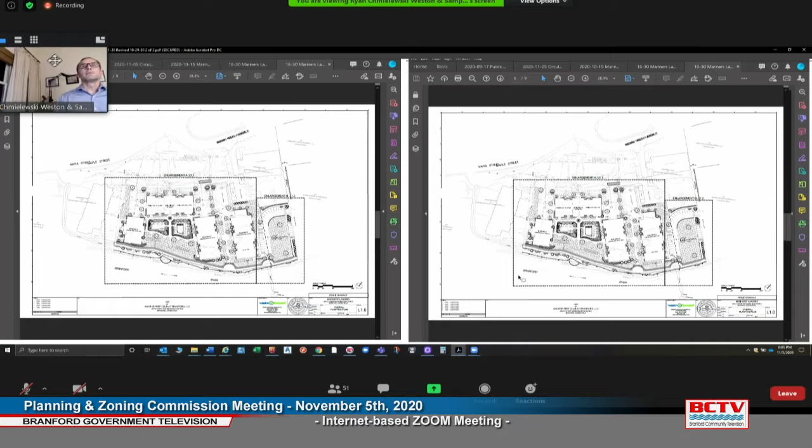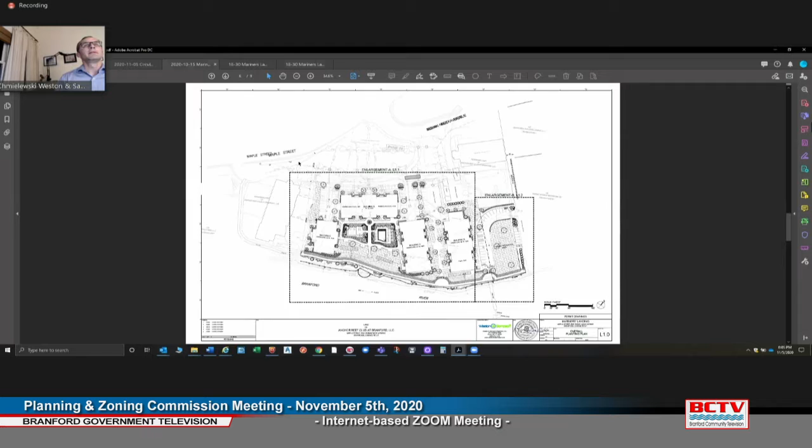As an overview of the project, along the shoreline you have the 8 foot concrete sidewalk and the 7 foot of stone on the uphill side. I have an enlargement detail of these that we used to discuss with Mr. Goucher, showing it closer at 20 scale, where we're almost 12 feet away from the building now. We've put a screening of northern bayberries to provide more height and a vegetative buffer between the two, rather than just a vegetative seed mix.

And then on building C we've done the same thing. The walkway is now between 14 and 15 feet away from the corner of building C, and we've also increased and added a vegetative buffer on this edge as well, rolling it back up into the hillside.

In terms of, while I have the PDF up here... Can I ask a question about the last one? Sure. What's going on the slope with that hatch mark area? That is a native seed mix, slope stabilization mix by New England Wetland Plants, which will also provide wildlife habitat.

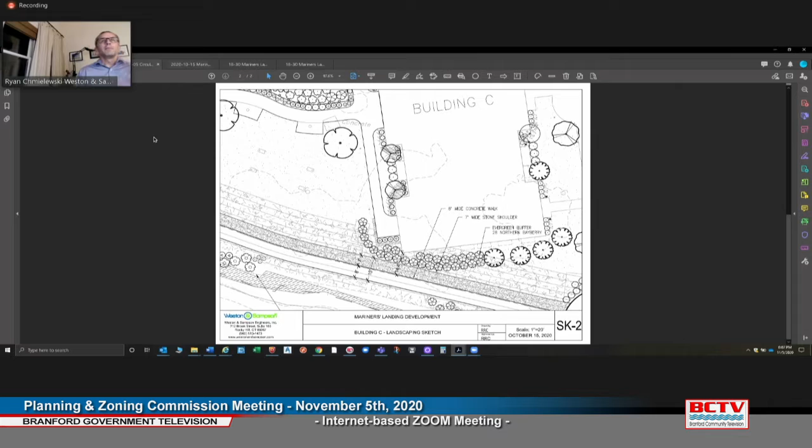So I'll move on to the pedestrian access plan. There are some minor tweaks that were requested for this plan, I'll highlight those quickly. We've added 2 signs just stating public access, intended to be placed down to the dock to let people know the dock is public access. Even though the brown kayaking and hand boat launch signs indicate that, this just reinforces it with language. We've added the second public recreation space signs in 4 locations along the perimeter of that public recreation space that's part of the plan. We've also added the vehicular circulation coming in and out to the public parking.

And we've made the connection showing the public access coming in and out of the cafe from this lower walkway. Prior to that we omitted that pedestrian access point. Ryan, Harry Smith, Town Planner - is this the plan you sent at 7 o'clock tonight to me? Yeah. Okay, thank you. Are there any questions about this?

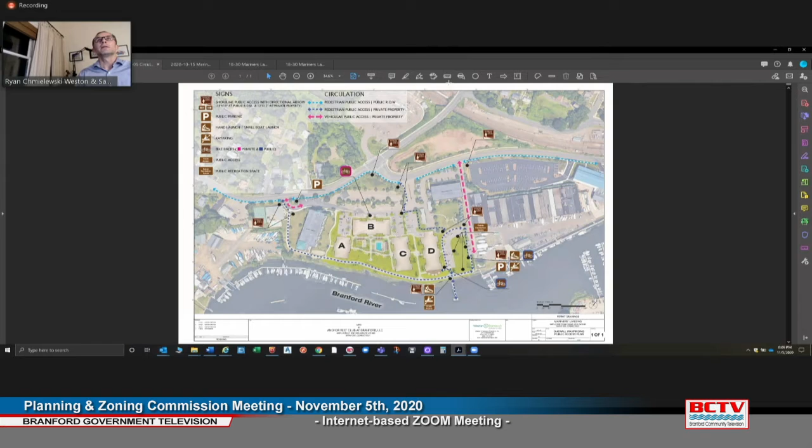I'm going to stop sharing, and then go to a description on page 10 of comments received from Harry Smith. He was asking to provide a description of how we tied the more robust planting provided in the revised drawings last time into the existing planting scheme and tied it in with the existing development.

Part of the changes: we covered the entire building perimeter where feasible with foundation plantings, just like the original building has been planted. We've added small flowering trees to the foundation plantings to be in harmony with the proposed architecture, provide more variation in planting height along the foundation to bring the buildings down to human scale, and provide more seasonal interest. We've also added additional trees along the public access walkway to the north of Building D.

This was stated in the previous public hearing, but I've now provided written comment: we've matched 2 tree species, 5 shrub species, and 1 ground cover. We changed the palette a little to be more in sync with the town's modern requirements for native species, to promote wildlife habitat and more resilient planting, and we've also made specific selections respecting outward views towards the water.

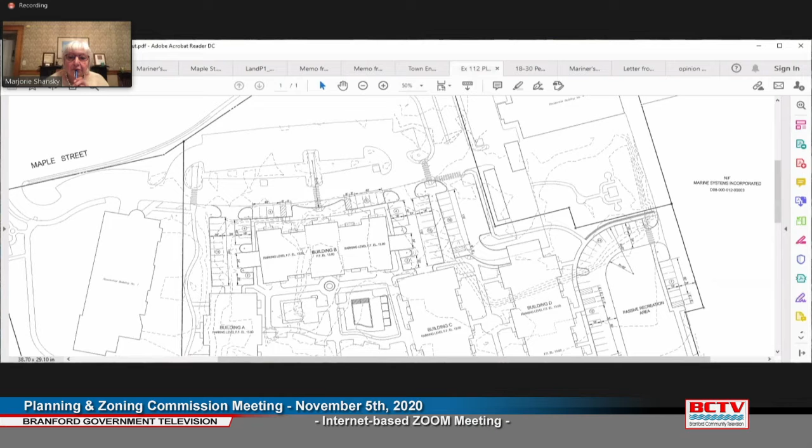You should be able to see the plan sheet from the revised plans submitted on Monday the 2nd. This sidewalk was missing and has now been added to the plan. I think that's an important connection, parking here, you can walk down to the public access. It sort of rounds out the whole thing, so that's been addressed.

Shoreline public access plan, I appreciate it. Looks like it addressed what I had requested. Going back to the comment down here, I just wanted to make sure all the features that are open to the public are on there and appropriately marked. I'd have to review that since we just got it at 7 o'clock, to make sure that's all set.

So down here, I think Attorney Shansky discussed this comment I made about having the new residents and tenants of the development be informed about the public access. I think that is very helpful. Possibly having each one sign off would be one more step I could think would be additionally helpful, but I think that addresses the comment.

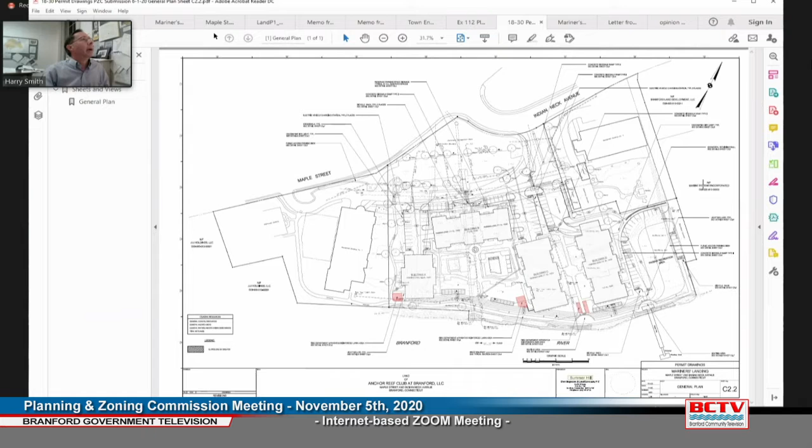Going back - I think the landscaping plans have come a long way and address all the comments. However, I'd like to take a look at them since they just came in this past Monday, to make sure all the details have been addressed. It seems like it's in good shape and has addressed all the comments. This was discussed tonight - how the revised landscaping corresponds and is keeping with the prior landscaping installed and on the plans.

I've got a separate memo on lighting I'm going to pull up quickly. I did do a detailed review of the proposed lighting plans. Generally, the pole-mounted fixtures are dark sky compliant, lighting levels are not excessive, and they're in good shape - they don't generate an excessive amount of light on the ground.

I did have a concern with the pole-mounted lights along the pathway, the Riverwalk. The detail shows these poles as being 12 feet, but the photometric plan shows them being 14 feet. It seems like the photometric plan's analysis of the foot-candles generated on the ground is based on the 14-foot height, but 12 feet is what was approved 15-20 years ago. It seems like 12 feet is what's proposed, but it's not clear since aspects of the plans don't agree with each other. I think it's important that it's the 12-foot height - it's a much more pedestrian scale. We might need to adjust the fixture somewhat to make sure it doesn't generate excessive light on the ground.

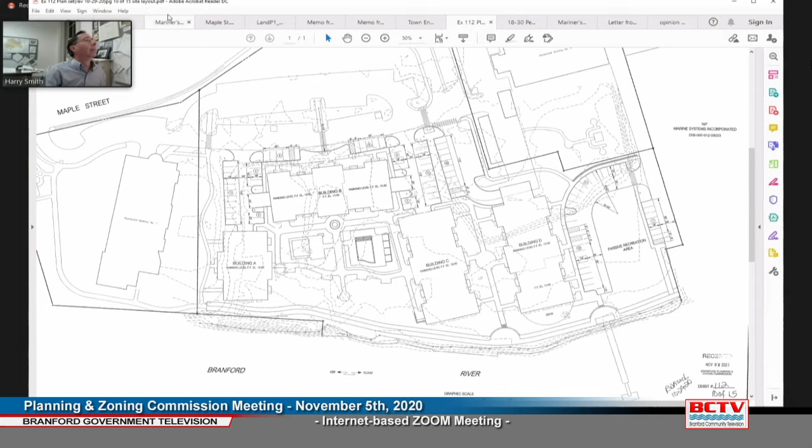So coming down to drainage, I think I've covered all that. Mentioned by Attorney Shansky, been reviewed by Town Center Village District. I think all of these are addressed.

I believe the tulip trees were replaced with an alternative. Frankly, I haven't looked at the last landscape plan, so I just sort of need to double check all of it.

We have comments from John Goucher. At this point, we really don't have confirmation that John Goucher agrees with the comments just received today from Mike Ott. I did forward those to John Goucher after the close of business, after 5 o'clock today, and I didn't get a response from him. I think I'd left for the day somewhat after 5. He did send something to me, but by the time I sent the other ones to him, I did not get a response back.

I did get the letter from Mr. Muniz, which was mentioned by Attorney Shansky. I understand this is within the purview of the DEP in terms of reviewing the work that's underway and approving the closeout of the remedial action. So that could be addressed in a condition on any potential approval, or buttoned down at some point, either for construction on the buildings or before occupancy.

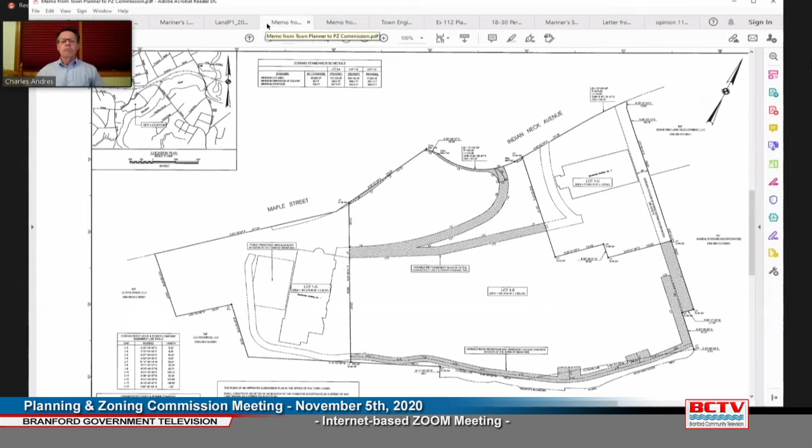Looking for my memo here. Here we go.

There's a methodology and several options to looking at the potential costs of town services. And this isn't, I don't think, a regulatory thing.

I just want to note for the record that I did submit a paper here that was presented by Dr. Mullen, an alum of my planning school. This is available at the Lincoln Land Institute. They request that there be no photocopying, so I did not photocopy the paper. I did print it out, which is apparently allowed, and I gave you a URL, which is apparently allowed, so you could access it. I'm just going to leave that for the record.

So where does that leave us? Closing the public hearing tonight, I think could be done. I would just point out that I think we should provide an opportunity for John Gaucho, DEP, to submit staff a final response to statements of Mr. Ott on the record tonight.

To make sure all those little loose ends are buttoned up, we're waiting for the town engineer's response with respect to the drainage. That could either be handled through comments from the town engineer -- he may be satisfied -- or we couldn't actually put new drainage information into the record if the public hearing is closed tonight. It could potentially be a condition of approval. The applicant's willing to live with a condition that says essentially the stormwater management plan needs to be modified to the satisfaction of the town engineer, or something along those lines.

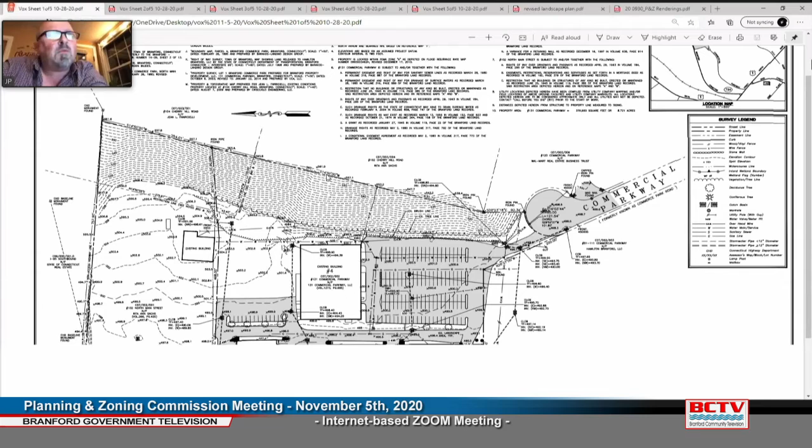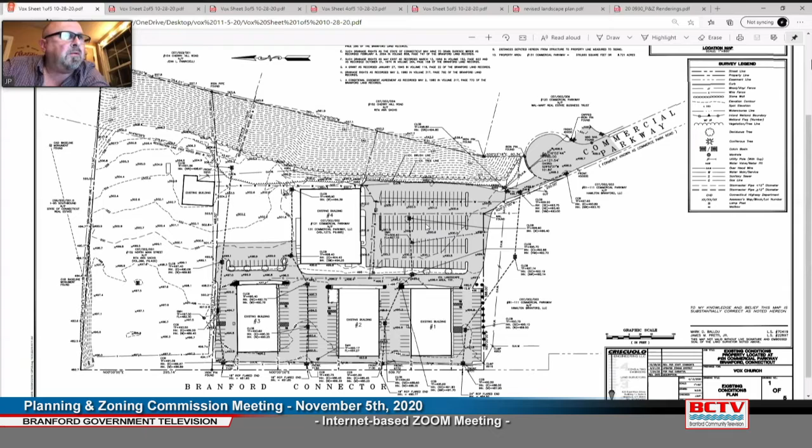Here is the existing conditions plan. Again, this was the cul-de-sac, and looking in was that first picture. I don't know why that yellow box is popping up. This is that power line I was just talking about, running along this edge to the other building. All the significant trees are up in this bank. Here's the existing parking lot I showed you, the existing building to be removed, and that island with the cherry trees.

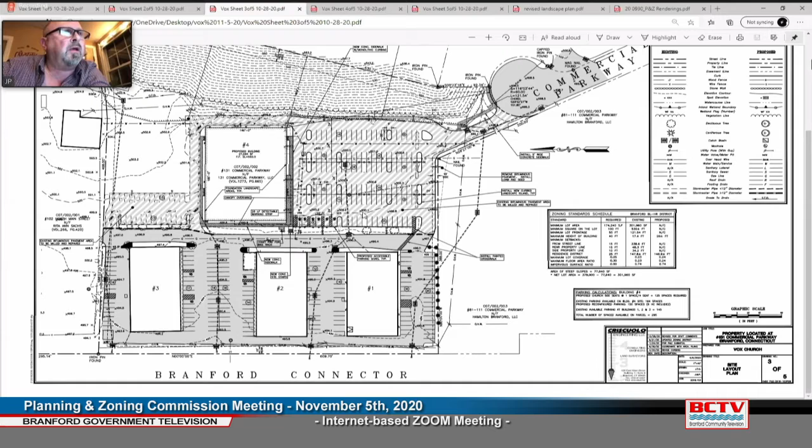So here's the proposed plan. Basically we'll be resurfacing and doing some micrograding of the parking lot. We're adding some islands, which I'll get to with the landscape plan. We had originally shown the islands in the middle of the parking lot and at the ends, so it was an island, 10 spaces, an island, 10 spaces. We've staggered it so the islands in the middle are split instead of back to back, which spreads out the required trees and provides more foliage spread across that large parking lot.

There is handicap parking access here. One comment was about not seeing where the accessible path is into the front of the building. Noted here is a detectable warning strip. There'll be a flush condition at the sidewalk, and the entry is right here on this building. There's a bike rack next to the building along this major sidewalk, and again there's a flush condition, so it's easily accessible by bicycle.

So that's just the quick overview. We can go over the comments and what's really changed, and my comments, starting from the beginning of the staff comments.

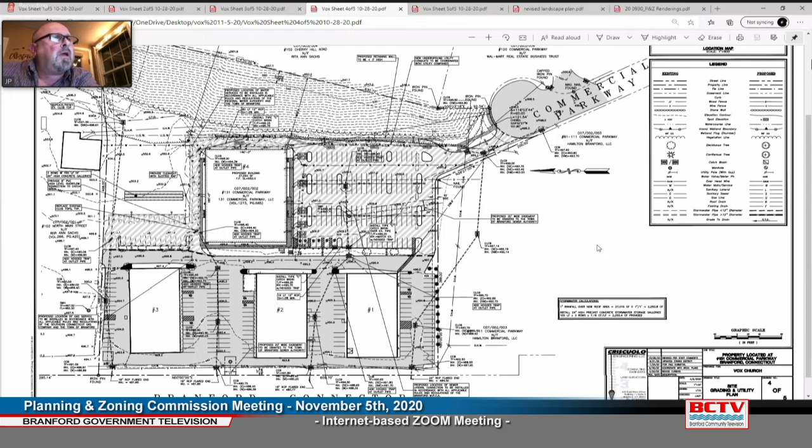Let's see what else. I guess it's probably best to show the landscape plan. Larry Appleton is here, I saw him on the line with us. He could go over some of the design thoughts here so you folks get a better idea of what we're thinking.

Here you can see how, instead of putting the islands back to back, we split them up so that you'll end up with canopy scattered back and forth, instead of just one strip down the middle, plus trees on the ends. There was a comment about adding a tree to this island. I neglected to do that because we're adding 3 pin oaks right here, but to meet the regulations we need to add one on the end. We can move one of these into that island, I suppose.

Larry Appleton, if you have audio, would you like to describe your thought process for the landscape? Can you hear me? Yes, sir. Okay, good.

The whole thing begins with Commercial Parkway. You're driving up an asphalt road, surrounded on one side by everything from construction debris to vegetation that's not exactly cared for, chain link fencing. You come up through this narrow passage and you're suddenly confronted by, of all things, a sea of asphalt. So the very first thing I began to do was try to do something to negate this sea of asphalt.

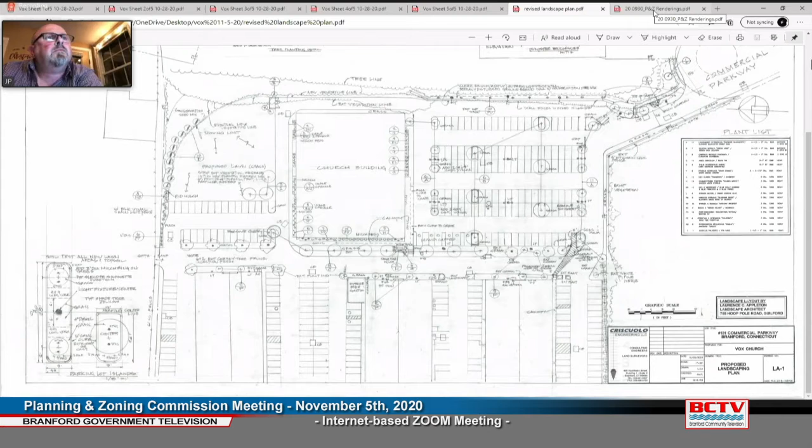I guess, Marjorie, I'll let you take back over, and then I'll just save myself for questions. Thank you, Jim. Mr. Chairman, I think this may be when the beta group will talk to you about their reporting.

Unless you hear from Mr. Sullivan. How would you prefer, Attorney Shansky? Would you want Mr. Sullivan to present, or should we ask our consultant to go first? Mr. Sullivan presented at the October meeting, and I think to make it orderly, this is probably the time for beta group and then Mr. Sullivan's response. Okay, why don't we do that?

So you're otherwise complete at this time, Attorney Shansky? Yeah, because we understand that the hearing will be kept open for beta group to respond to Mr. Sullivan's response. So that's all we need to do tonight. Thank you. Okay, great. Thank you, Attorney Shansky.

Caitlin, did you do the staff report on this one?

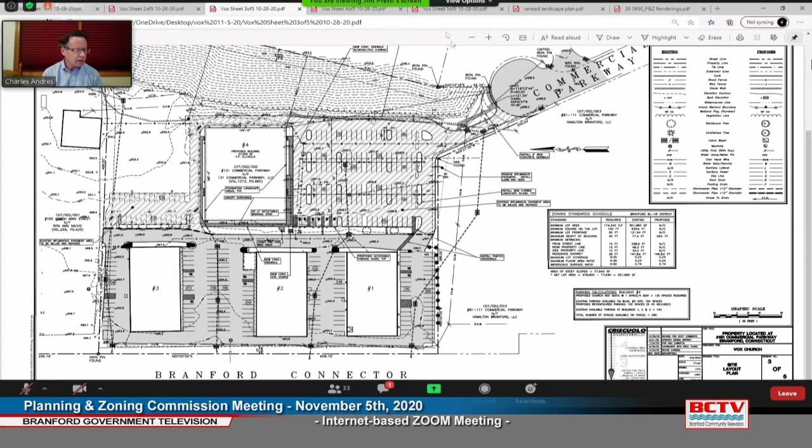Is there any further questions or comments by commission members, staff, or the applicant? If not, then we will continue this matter to our November 19th Zoom meeting. Thank you, Mr. Chairman.

That brings us into items number 4, 5, and 6, and 7 actually. Those are all the Metro 375, the PDD Master Plan Amendment, site plan for a mixed-use development, and special exception for earth grading. Item number 7 was the zoning text amendment, but maybe we'll do that one separately.

So we have, this is continuation of public hearing.

Is the applicant here? We are here, Mr. Chairman. My name is John Nuff, I'm an attorney with an address of 147 Broad Street, here on behalf of the applicants. As you noted, there are 4 applications before you. In contrast to some earlier this evening, I think we're pretty tidied up and ready to close this evening. We received comments from Harry, and we responded in a very comprehensive fashion on October 28th, so our responses and revised plans have been in for over a week.

I believe, in conversations we've had with Harry today, that he's largely satisfied with all his responses. I think we have incorporated every one of his suggestions almost to a one. We have an issue outstanding regarding shared and cross access that we can discuss, but in the interest of time, we might want to have Dave Golubowski quickly run through our response memo, hitting the highlights without getting into every detail about tree staples and such, and then we can discuss any other matters on the commission's mind.

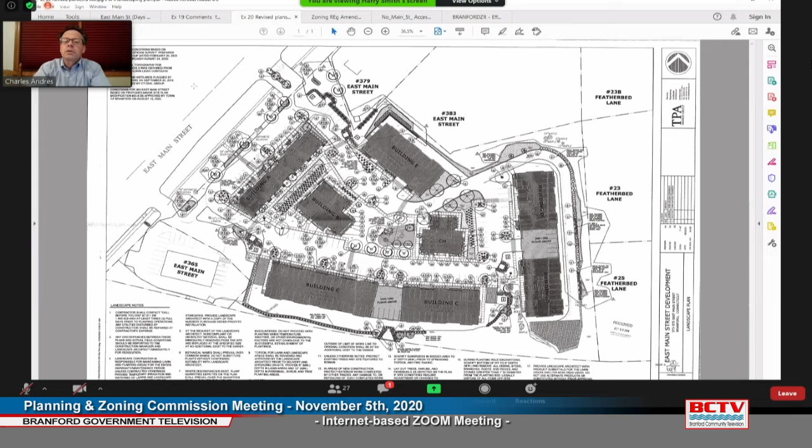Chuck Andres, Chair. Thank you, Harry. Are there questions or comments from commission members? Seeing none, let's open it up to the public to see if there's any public comment.

Caitlin, does any member of the public wish to comment? Caitlin, do you see anyone? I don't. Okay, then we'll turn it back to the applicant.

Let me ask on the question of the cross easement issue. You heard Harry say that it's not appropriate now and it may never be appropriate. However, one possibility may be that should there be a change of use or something in the future, maybe we could require it at that time, or we have authority to require it at that time. Apart from the issue of how you read the regulation, we're creating a new zone here, and we kind of have authority to do this. That doesn't mean we ever should or whatever, but anyway, do you want to comment on that?

Mr. Chair, we're more than happy to take the guidance of the commission. It was just a difference that Harry and we had in reading the regulation. Obviously, we don't think having traffic on a predominantly residential property is desirable for us. However, if you feel and the commission feels it's necessary, I think the regulation reads in such a way that you really have discretion. It says feasible where possible. It's kind of a common sense question, I think. I really don't think it's an absolute direction. I'll leave it up to the commission to tell us what you'd like. If you'd like an easement in the future, on the approval that says we'll provide it, we're happy to do that. Again, this is a common sense question, and we'll leave it to the commission.

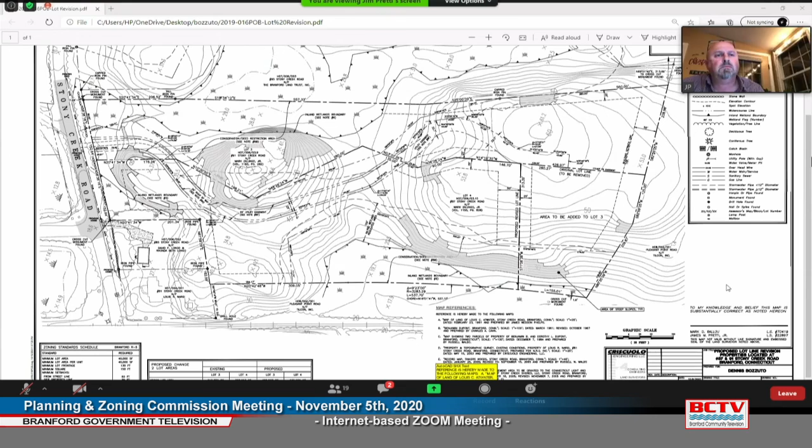Thank you, Mr. Preti. Kaitlin, you did the staff report on this? I did, yeah, and Jim explains the bulk of it. A lot line revision falls under our subdivision regulations, and the procedure is you file a re-subdivision application with the plan, and the commission needs to make a finding based on the regulations that there is no re-subdivision and it is in fact a lot line revision, so they don't need to proceed further down the path of a re-subdivision. In your memo, there's guidelines for what constitutes a re-subdivision, including a change to a map that affects a street layout, any change to land reserved for public use, and anything that diminishes the size of a lot and creates an additional building lot. It doesn't meet any of those criteria, so it's staff's opinion that it is a lot line revision, and the commission would just need to make such a finding. Any questions from commission members?

Someone want to make a motion that the proposed lot line revision for 87 and 91 Stony Creek Road does not constitute a subdivision or re-subdivision, and is therefore approved. Motion by Chadwick.

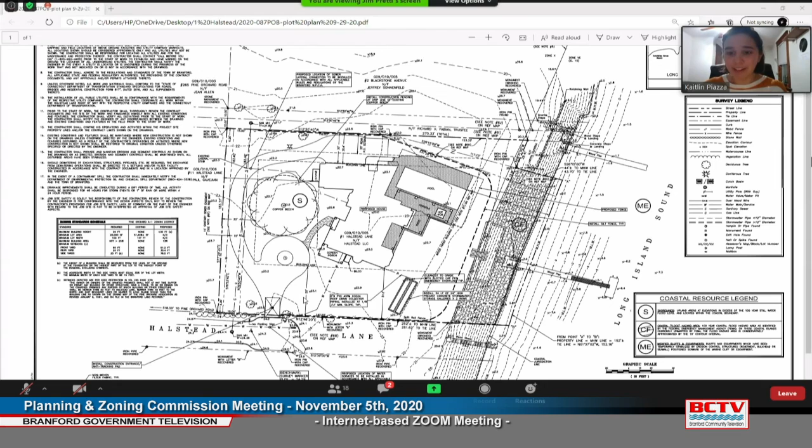The application is under Pine Orchard zoning, and it was already approved by their zoning enforcement officer, so we're just reviewing the CAM. I would say the bulk of any possible impact to coastal resources was probably done when that riprap wall was replaced a few years ago, along with the landing and retaining walls. So I haven't identified any new potential impact that the house creates beyond what the wall already mitigated for. I included a general comment that erosion control measures should be installed prior, and any comments from DEEP, which I don't think have been received, should be incorporated into the plans, and that we're going to want a final plan set. But I don't really have any concerns - I think the wall probably created any issue that was going to be created, and that was properly mitigated already. So that's where I stand on that.

Thanks, Kaitlin. Any comments from her? Harry Smith, Town Planner: I think we did get something from DEP, and I've got an email here.

And the bottom line is, provided adequate soil and erosion control measures are implemented, regularly monitored, and maintained for the duration of the construction activity, no sediment, concrete, or debris will be allowed to enter the adjacent coastal waters. No further comments about it.

Essentially, the bottom line is she has no comments as long as soil and erosion controls are implemented and nothing's going into the water. Great.

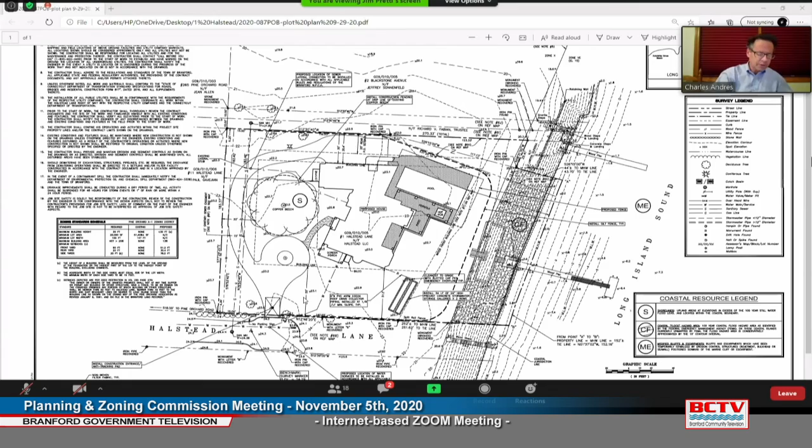Okay, Kaitlin, I have your memo, which is your staff report, with your findings and conditions. Kaitlin mentioned the one finding and the three normal conditions she reviewed. Any further questions? If not, does someone want to make a motion to approve the application with the finding that it's in general consistency with CAM policies and procedures, and the three conditions: soil and erosion, final plans, and that's it.

We don't even need three, right? I don't think so. Yeah, delete three, so we can go with just 1 and 2.

So someone want to make that motion? Approval so moved, John Lust. Okay, John makes a motion to approve with the finding and the 2 conditions.

Is there a second? Joe Vayuso seconds. Further discussion? All in favor? John, in favor, yes. Joe Chadwick, in favor. Joe Vayuso, in favor. Marcy's in favor. And I'm also in favor, so congratulations.

Thank you, and thank you folks for staying open for me. Absolutely. Okay then, so running through the rest of the agenda.